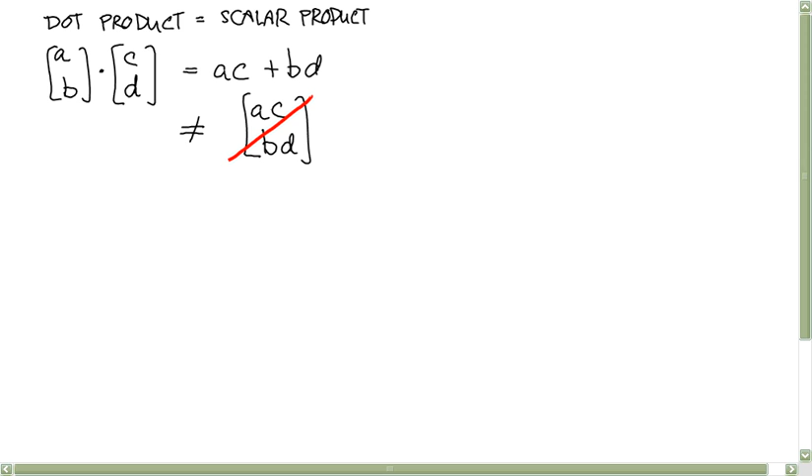And then the second thing was vector notation. Say something like this - that overarrow means... I don't know if I'd call this a definition of what a vector is, but I think this is a good way to think of it: anything that has this overarrow over it means you can break it up into components.

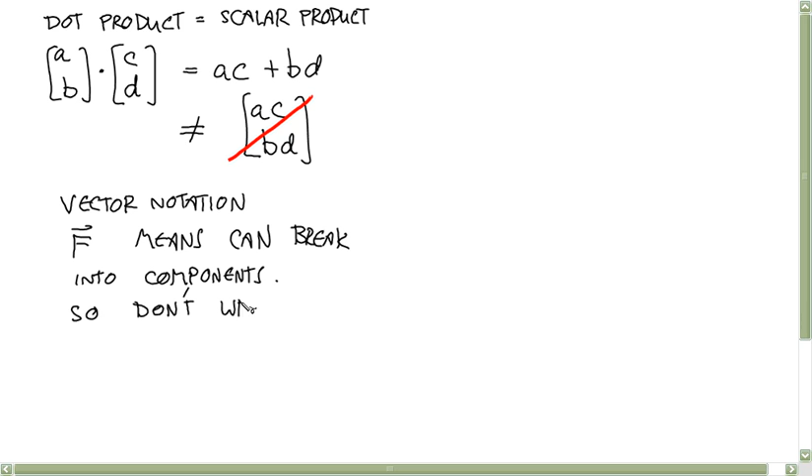Don't write this vector f as equal to fx, fy with the components having vector notation, right? Because we're all the way at the lowest level at this point. There's no components inside these components.

When you're talking about vector components, you should write those without arrows, which indicates that those components are scalar variables. And that's what they should be - you have a vector whose components are scalars, and this is how you indicate that. So when you use these components in equations, they shouldn't have arrows over them.

This is useful in making it clear to yourself what you're writing about. And it's also useful in the dirty little secret of engineering, math and physics - if you write stuff down the right way, people think you're smarter. So this is an easy way to look smarter, and some of you really, really need that.

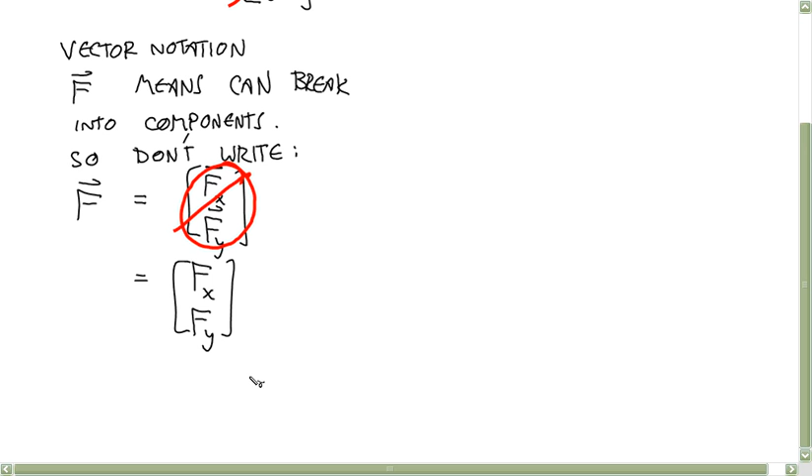All right, enough of that.

So today I'm going to finish talking about structures, and the way I'm going to finish is by - you might ask, hey Mr. Lakin, how come the way we did structures for 2 weeks in this class is not the least bit like what they do in the book? Doesn't that seem a little weird? So that's what I'm going to talk about - why the book approaches structures in a totally different way. I'm going to do one example problem, tell you the benefits of how they do it, and tell you why we did it a different way.

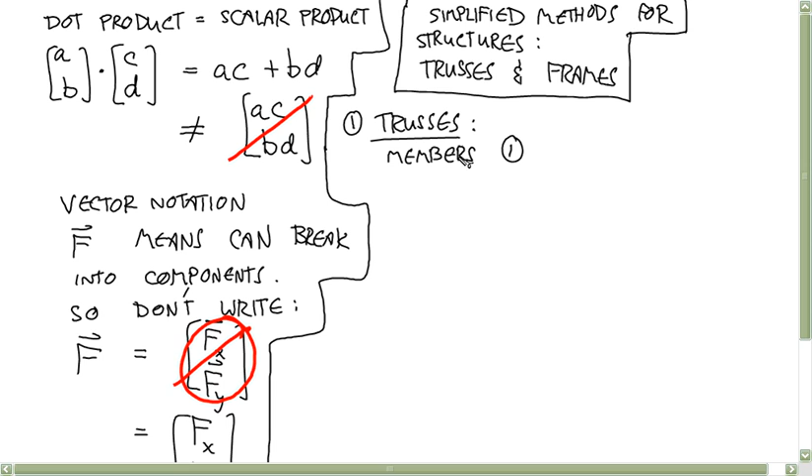So first, trusses. Here's what a truss is: it's a set of members connected by pins. I'm going to number the things required to fit into this category of trusses so you can use the method in the book. These members are connected by pins, the weights of the members are neglected, and all loads on the structure are applied at the pins.

And if any of these conditions aren't met, you can't use the method in the book. That's a pretty strong set of requirements. This whole method that half of chapter 6 is spent on - just decide you want to take the members' weights into account and you can't use it, or decide you want to apply a load at the midpoint of a member, and you can't use it.

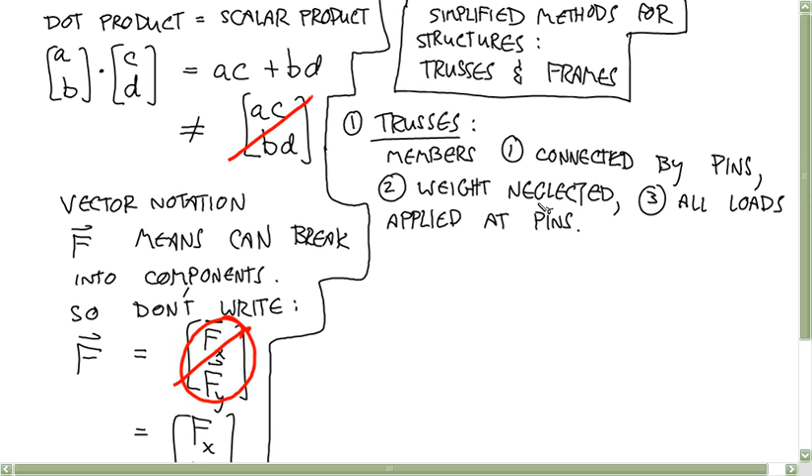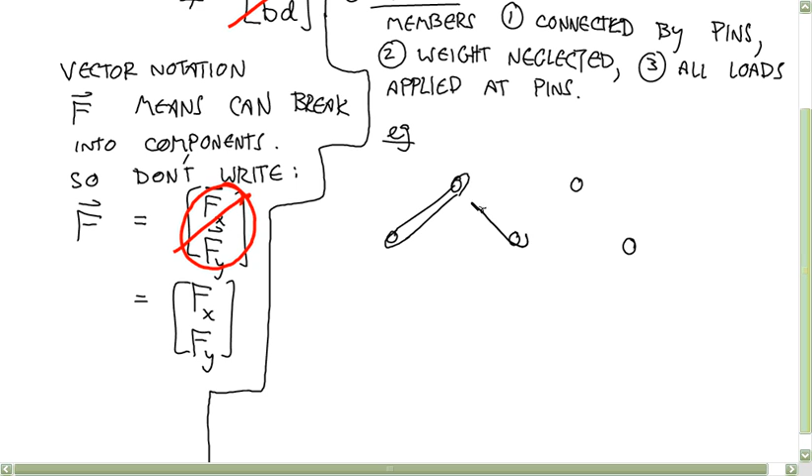So here's an example of a truss, and I think this is the example I'm going to solve. That's a pair of rollers there on that side. Okay, assuming these conditions are met for this truss, what are the loads in each of those members? Who can do that in their head? Weights neglected - yes, thank you - zero loads. So we got to apply something, because with zero weight, nothing's applying forces to anything. So I'm just trying to see who's awake - one person, that's better than average. Okay, so we'll apply a load at that pin.

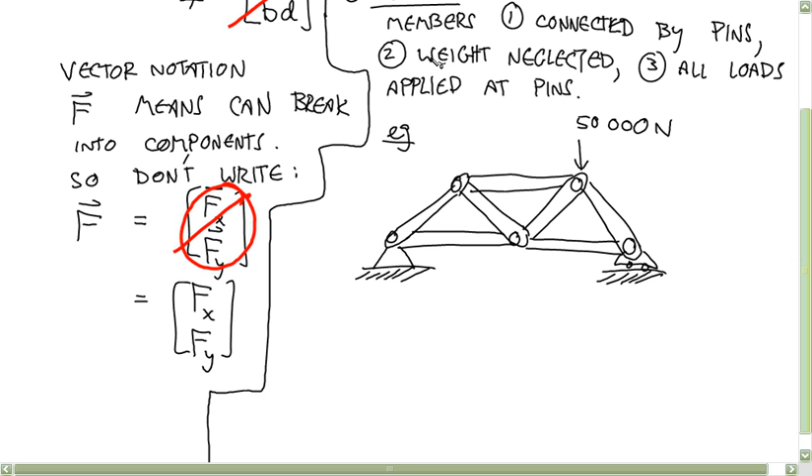And the simplification that we make, if all these conditions are met - like what can we do to make this problem simpler, to reduce the number of equations? Because that's what I mean by simplified - we're just going to have fewer variables and fewer equations needed to solve it. So if those conditions are met, the simplification comes from the fact that every member is just a two-force body.

And that means the forces along each of those members have to be along the line between the pins, right? That's a requirement, or a fact about two-force bodies. So the forces on each member are along a line between the pins. If you lose any one of these 3 conditions, then you don't have two-force bodies, and that's why this doesn't translate to any other types of problems.

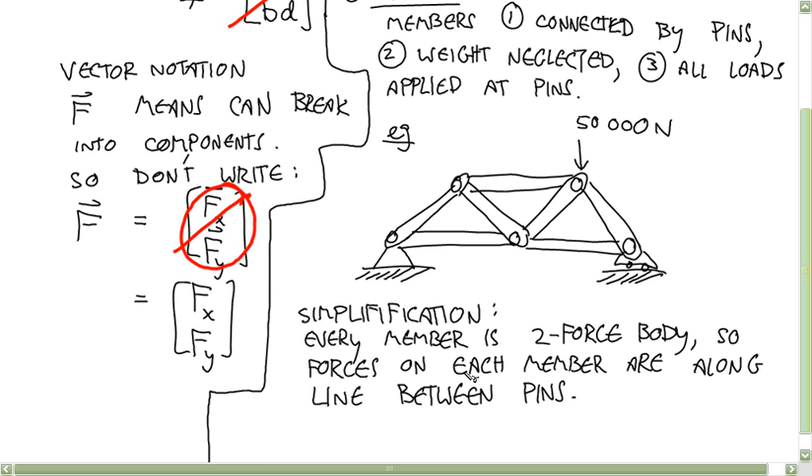Okay, so this was trusses. The second type of structure dealt with in chapter 6 is frames. And the requirements for frames - there are also 3 conditions that have to be met for this to meet the book's definition of a frame. The members first have to be connected by pin joints.

Second, only 2 members can connect at any given joint. And third, the loads have to be applied to the members themselves and not to the pins.

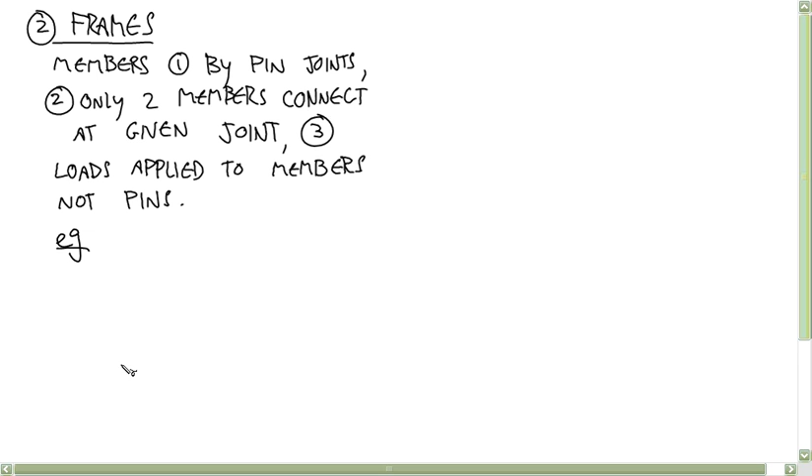And third, on these frames, the loads have to be applied to the members themselves, not at the pin joints - like this is applied to the pin. An example of a frame would be something like this. So these are all pin joints. This doesn't have to be a pin joint, by the way - that's a fixed joint in my example. But notice at any one of these joints, unlike the truss I drew, at any joint there's only 2 members connected.

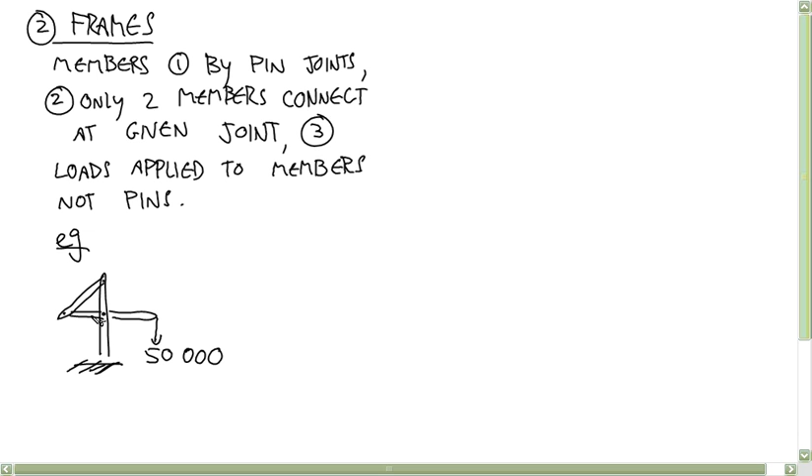The simplification comes from the fact that there are only 2 members connected at each joint.

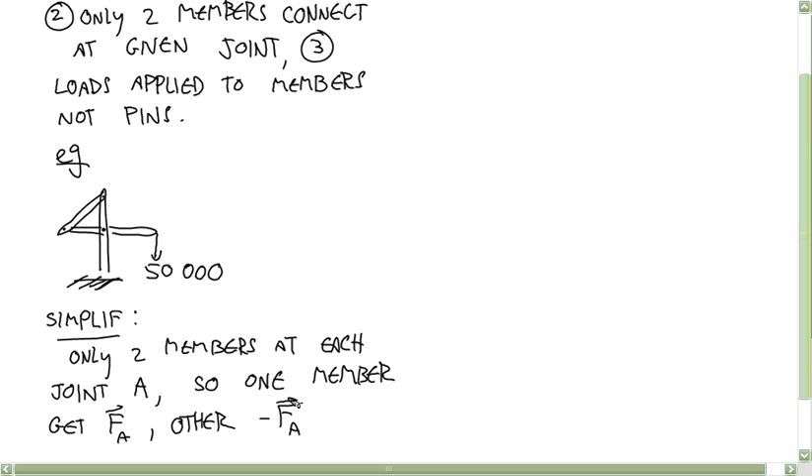And I'll say at each joint A, one member has a force applied on it that we can call FA, and the other one has a force applied to it, negative FA. Because of this set of conditions, we can talk about joint forces, the joint force FA. And actually, this method makes bookkeeping a little simpler than the way we talked about it before. But for the most part, this is fundamentally the method that I gave you for general conditions.

There are some things that make this method in the book a little easier, but I'm not going to go into that because it's similar enough to our method that I don't think there's much point. But I do want to do one example of a truss problem, so you can see how much this method reduces the number of variables, reduces the number of equations, and you can see how it all works. Actually, the simplification you use in a truss is something you can apply whenever you can apply it to any individual member of a structure that is a 2-force body.

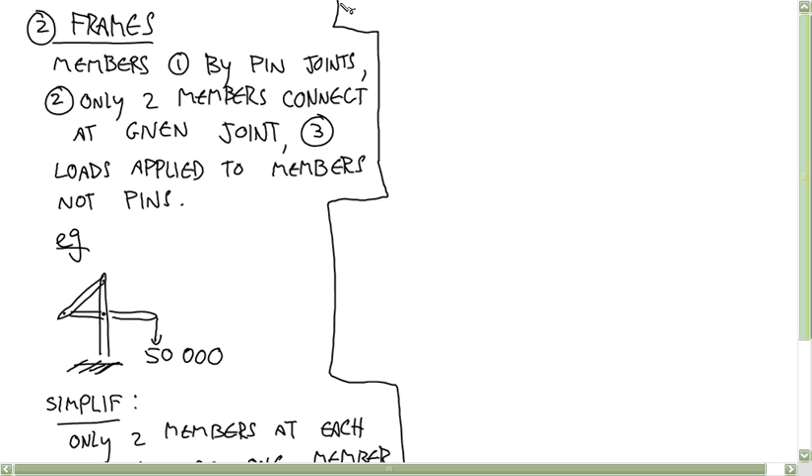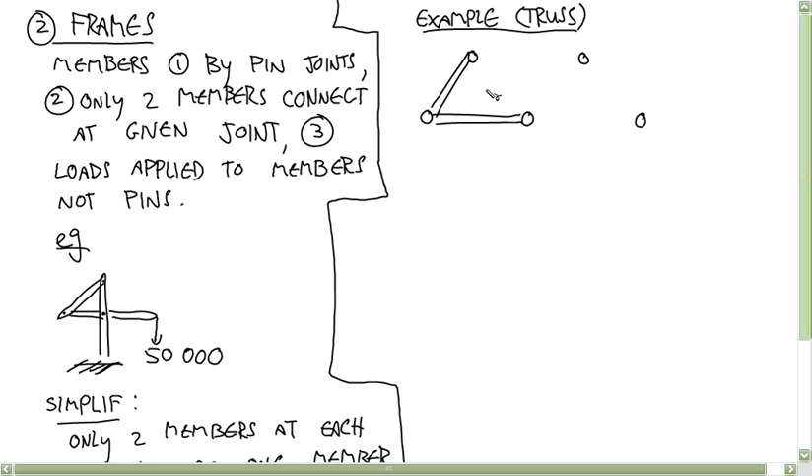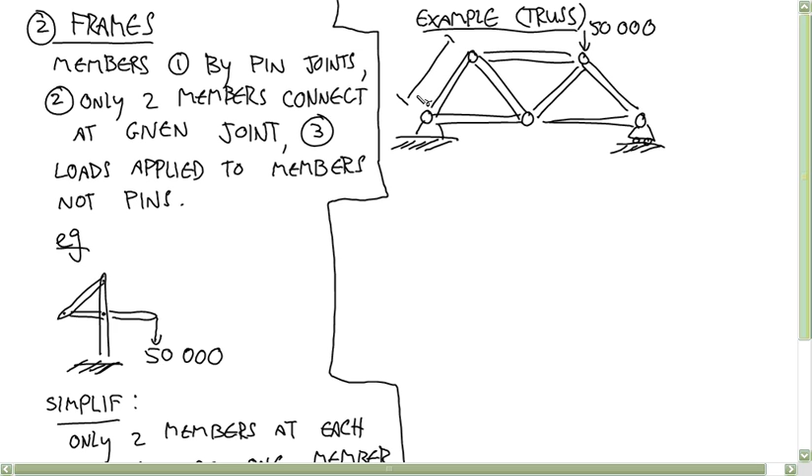So let's do this example, the one I drew here. I'll say that these are all equilateral triangles and all the lengths are 1 meter. Makes the math pretty easy. So 1 meter, and then all these angles are the same.

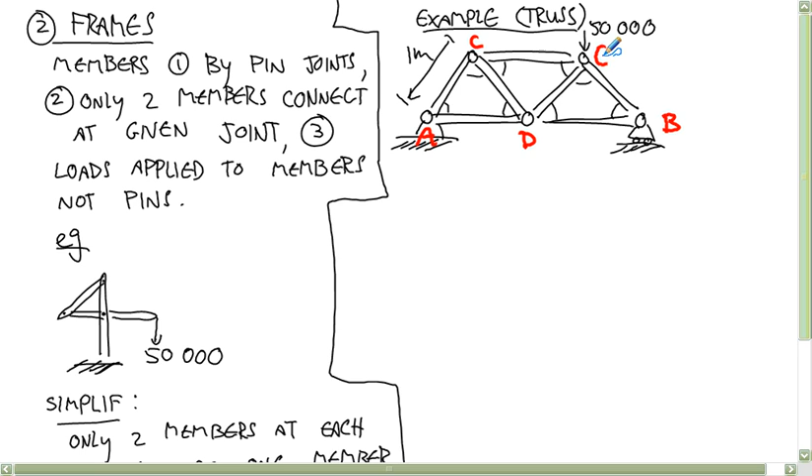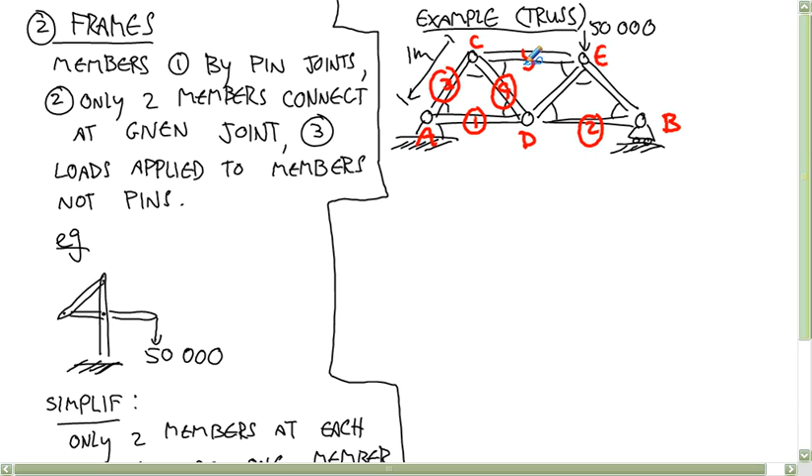So the first thing we're going to have to do to solve this truss is label all the joints and label all the members. So I'll say A, B, why is B over there? Who knows? C, D, E. This is literally the craziest lettering system I ever put together in my life. And then number the members: 1, 2, 3, 4, 5, 6, 7.

So the first step is the same first step that we do with our general method. We're going to isolate the whole structure, the whole truss, and see what we can figure out about the reaction loads. So the free body diagram looks something like this. There's the 50,000 Newton force.

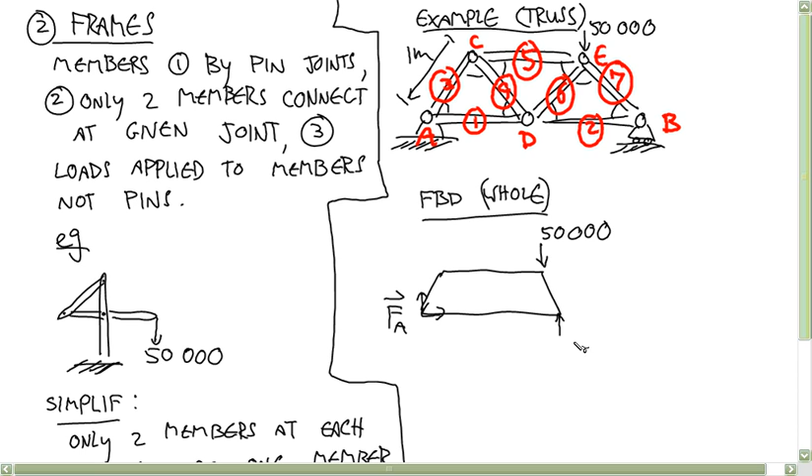And what kind of forces are acting on the whole truss at A? A force vector, yep, right. So I'll call that the force FA. And what's acting at B? Yep, so that's just a force perpendicular to the surface of contact. I'll call that force FB, and that's just a scalar.

And since these are all, we're going to see that everything's vertical. If this doesn't occur to you as something you can simplify immediately, that doesn't matter. Just write out the whole table. But I'm just going to go straight to Newton's second law and the rotational equation. So we have FAX, FAY, plus 0, FB, that's this force, plus 0, negative 50,000, is equal to 0, 0.

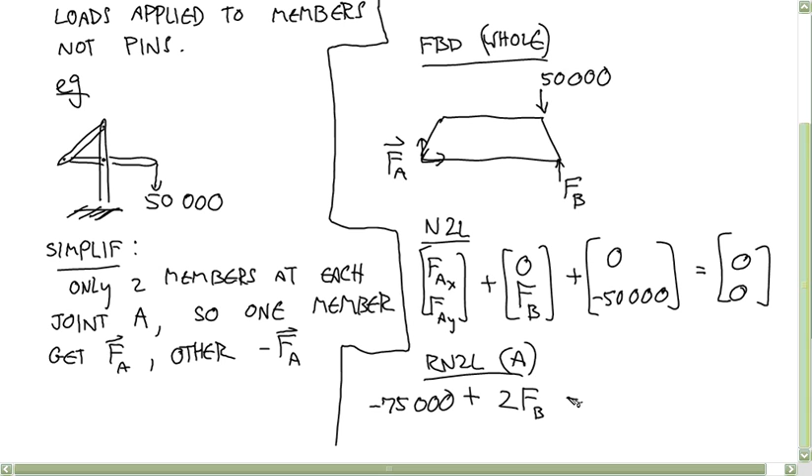And then the rotational equation, I'll calculate it about A. So there's no moment due to this. The moment arm for that 50,000 Newton force is 1.5, and that's going to produce a clockwise rotation, so that's a negative moment of 75,000. And then the moment arm for this force FB is 2, so 2 FB equals 0. You can solve this for those three variables. You get FB is equal to 37,500, and the vector FA is equal to 0, 12,500.

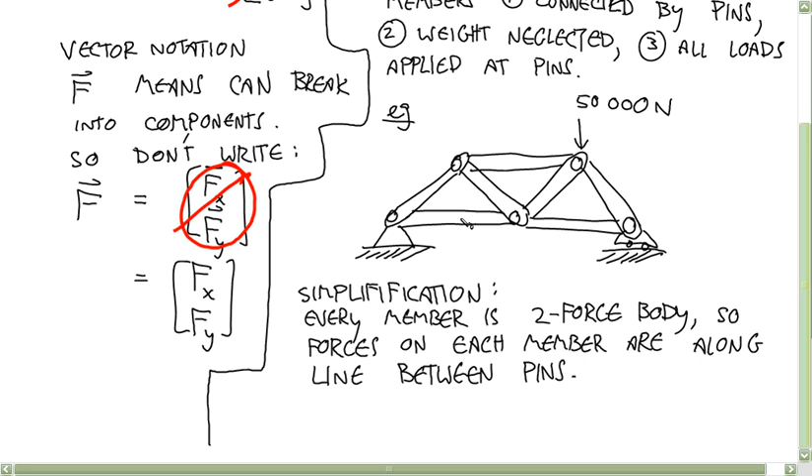So far we haven't done anything different than we do using our method. Now the big simplification comes. If you're looking for practice to clarify some of these ideas, here's something interesting that clears things up: try setting this problem up as a system of equations using the general method and see how many equations you get. It's a huge number, right? A truss like this big would be a very big system of equations you have to solve. That doesn't make it hard, but it makes it tedious, and especially back when people had to do a lot of these calculations by hand, it makes it something you want to avoid.

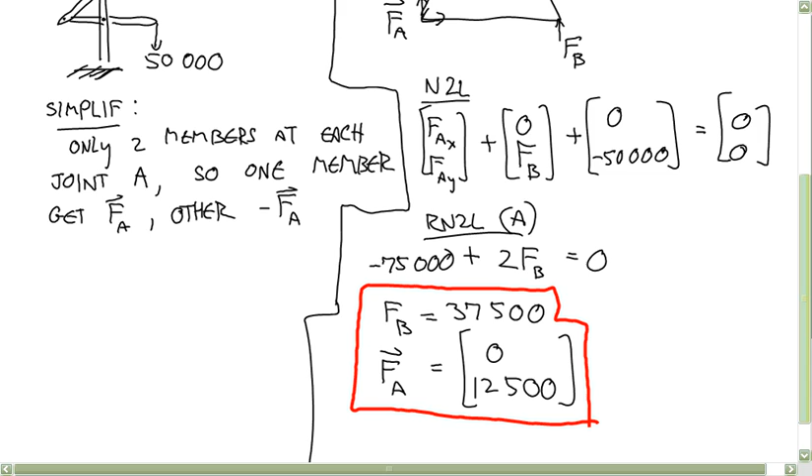With this specific truss method, we're going to get a real limited number of variables and equations. Okay, so now what we're going to do is go joint by joint. And since we know these are two force members, we know that those members have forces applied along the line between the joints. By Newton's third law, that means we can assume that the joints have forces acting in the directions along the members. So we're just going to go joint by joint, and since each pin joint can be thought of as a particle, we're only going to use Newton's second law. We're not going to use the rotational equation at those pin joints. So for every pin joint, we can get two equations, and the only variables we have are the force in a member represented as a single scalar. We know the direction—it has to act along the line of the member.

So let's go to a free body diagram of A. What forces are acting on that joint A? Well, we have this force FA coming from the pin, or from the ground, however you want to think about it. And we already know the magnitude of that, 12,500.

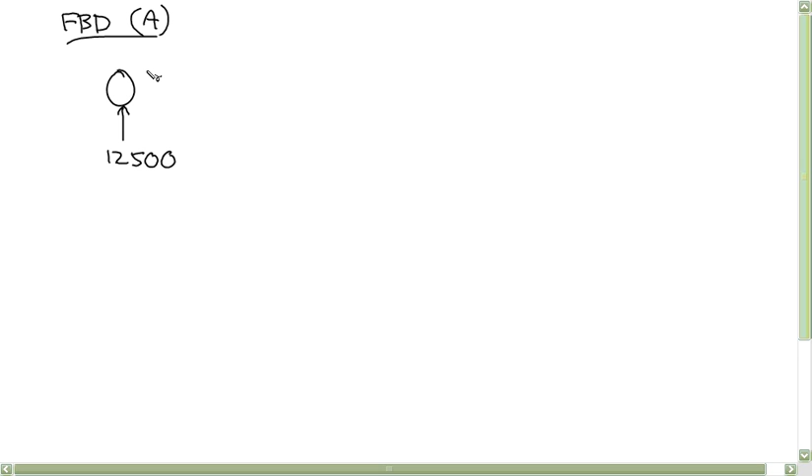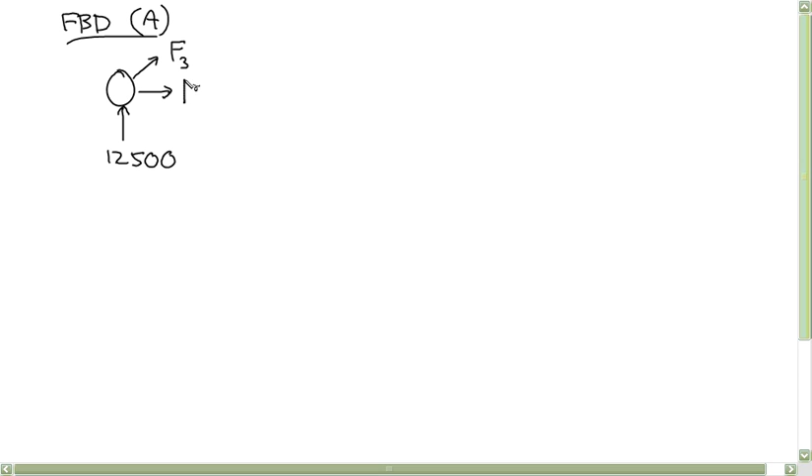So if the members are in tension, say that this member 3 is in tension, which direction is it going to pull on that pin A? Right, exactly. So we'll have a force that I'll call F3, because that's the force applied by member 3. And what direction is this member 1 going to apply at that pin? The right, yep. And those are the only loads acting on that pin.

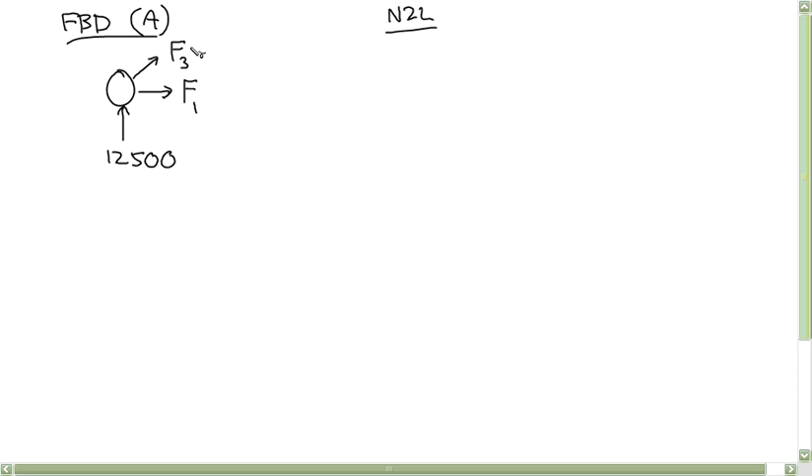So Newton's second law says, and you have to do some stuff with unit vectors, but we have 0.5 F3, 0.866 F3. I say unit vectors, but in this case you're just using sine and cosine to calculate what those are. But remember, that's what you're doing, calculating unit vectors. Plus F1, 0, plus 0, 12,500 is equal to 0, 0.

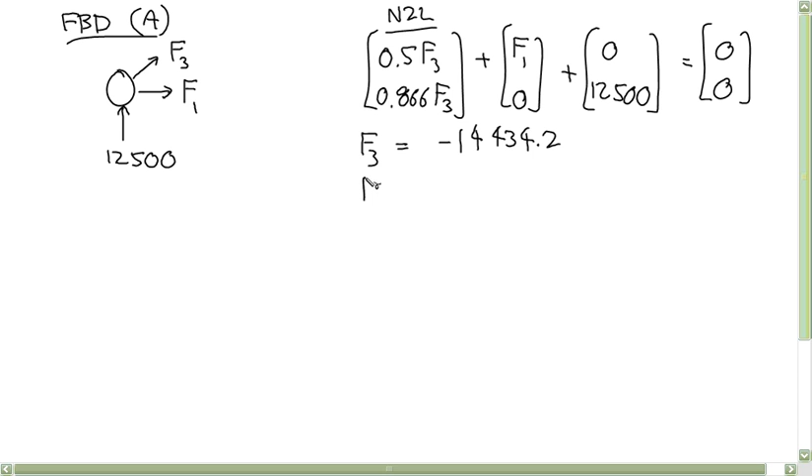And here again, we can solve for these variables as we go. You can't always do that, but sometimes you can. F3 is equal to negative 14,434.2. F1 is equal to 7217.09. Since F3 we got a negative answer, that means this is in compression. F1, since we got a positive value, that means it's in tension.

And now we'll go on to free body diagram of B. At B, we have a 37,500 Newton force acting up. Then we have the force due to member 7 that's acting. We're assuming, again, it's in tension, so this time it's going to be acting up and to the left. So we have F7. And then we have F2 acting to the left.

So we have, for Newton's second law, negative 0.5, 0.866, F7, plus negative F2, 0, plus 0, 37,500 is equal to 0, 0.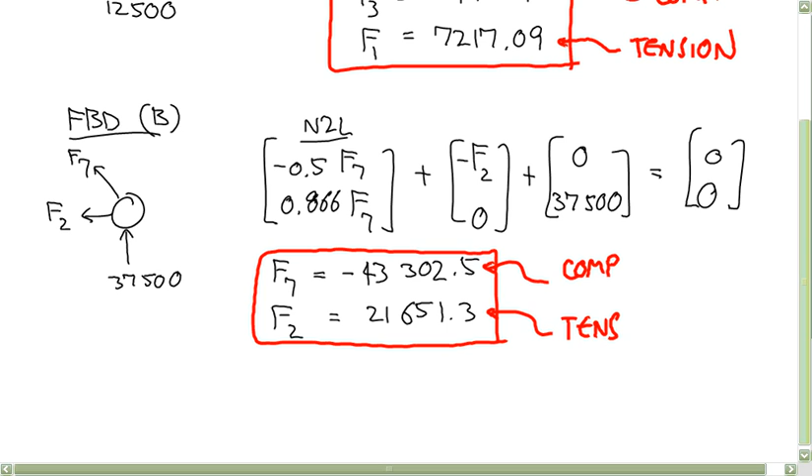And what loads are acting at D? We have a force F1. So remember, F1 at A, we're assuming it's in tension, so F1 at A was pulling to the right. Now, again, we're assuming it's in tension, but this time that same member is pulling this joint to the left. If it's in tension, it's trying to pull those two joints together.

So we have this force due to F1, and our force F1 was 7217.09. F1 is the one that's going the other way, so yeah, it would be negative, but I put the arrow going that way.

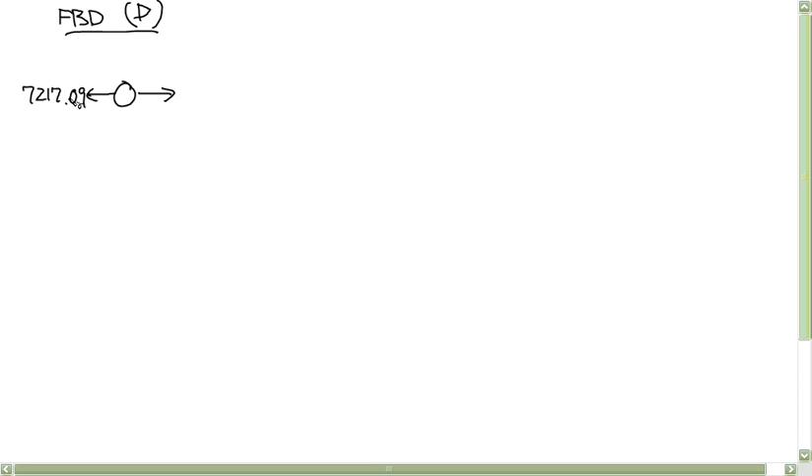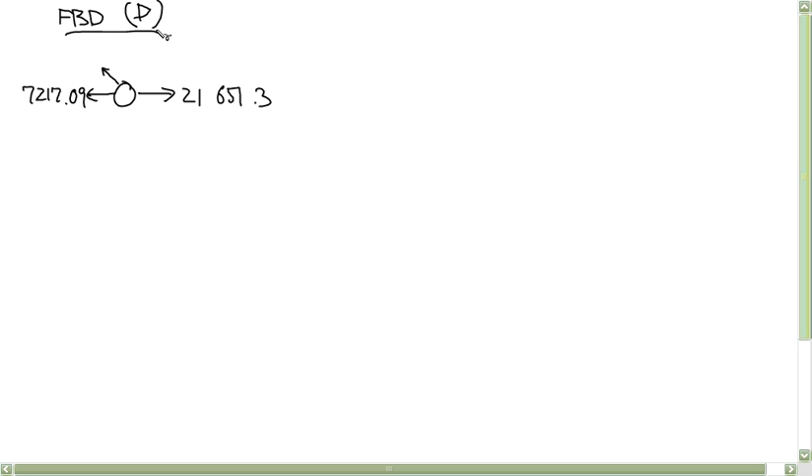And then going this way, we have the force F2, that's 21,651.3. And then we have a force F4 pulling that way, and a force F6 pulling this way.

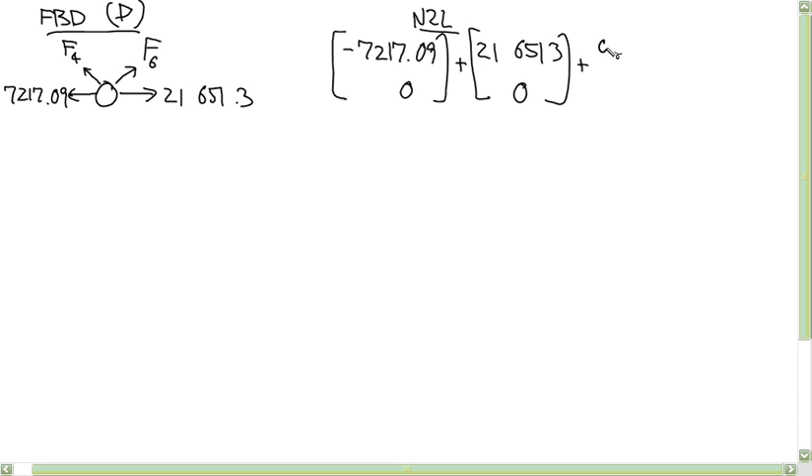So Newton's second law says negative 7217.09 plus 21,651.30 plus 0.5 F6, 0.866 F6, plus negative 0.5 F4, 0.866 F4 is equal to 0, 0.

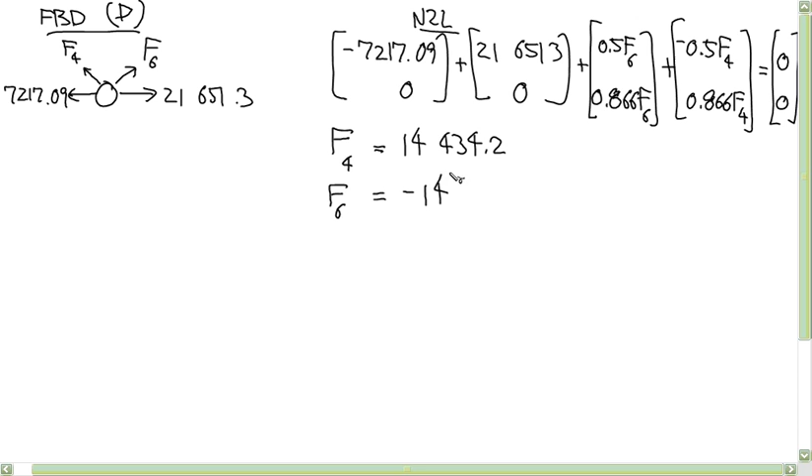And again, two equations, two unknowns, so we can keep just solving these as we go. No, we can't, can we? We should be able to. Yeah. So we get F6. This time, I guess you can't solve one equation for one variable directly, you have to solve it as a system. But you get that F4 is equal to 14,434.2, and F6 is equal to negative 14,434.2.

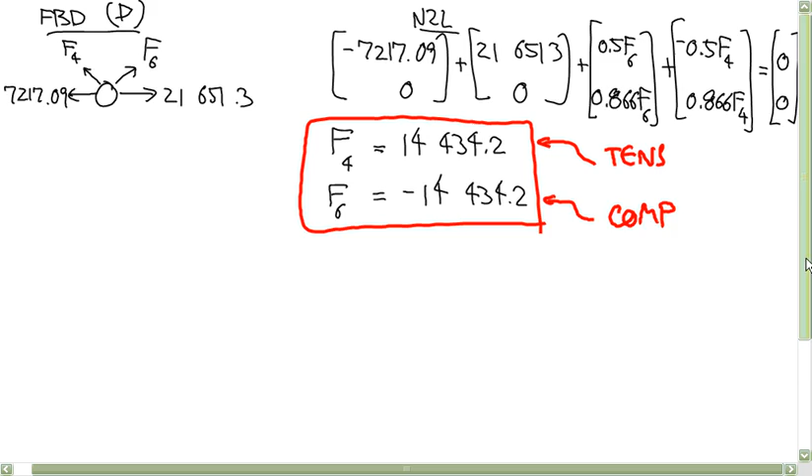So member 4 is in tension, member 6 is in compression. And now there's only one variable we still don't know, we don't know the force in 5. So we need to pick one of these joints that 5 is connected to. Okay, I'll pick C. So Newton's second law for C.

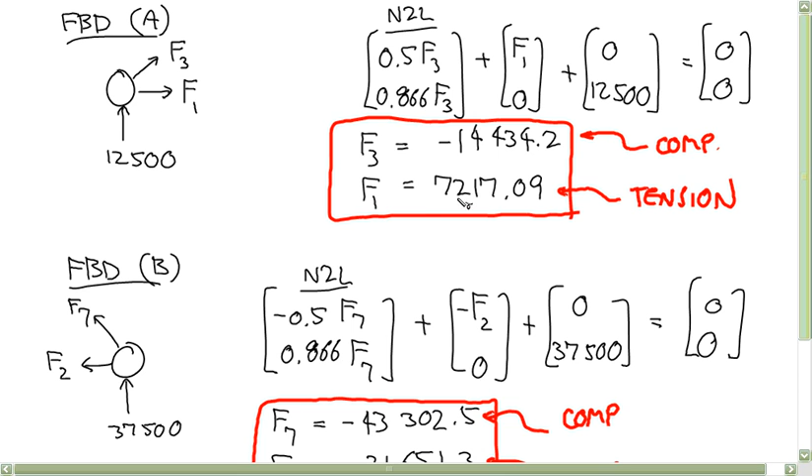What's happening at member one? There's this relatively, compared to the other forces, small tension force. We're not too worried about it. Members 3 and 4 and 5 and 6, some are in compression, some are in tension, but those forces are like twice as big as member 1, but there are still bigger ones, so those aren't our main concern.

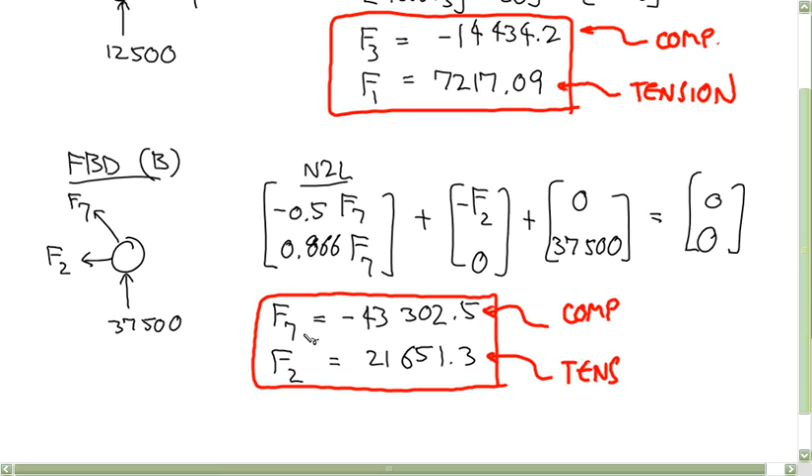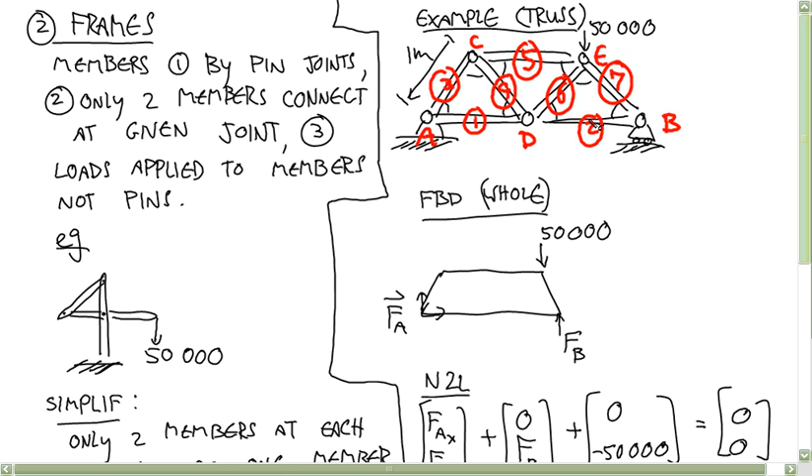But then you see that members 2 and especially member 7 have these big loads. So you'd look at this design and say, member 7, right here, I'm concerned that that's going to fail in compression—that's going to collapse. And member 2, I'm concerned that that's going to fail in tension, it's going to stretch, elongate. And that's how you'd use this information. But of course, you can get that same information from the general method; it just isn't quite as concise or easy, quick to solve.

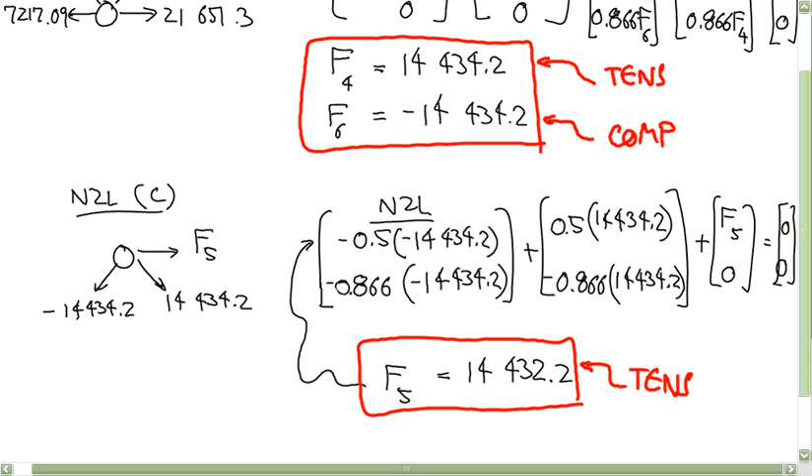Now, is it again for the truss method, you have to assume that the force is being applied at a pin? Yep. Right, so like if you were gonna say how much weight can the bridge hold, you can only do that if you're applying forces, like say at the pins. That's along the truss. That is true. Does that affect at all the calculation? Like say if instead you're worried about, well, what if the bridge fails in the middle of the member, does that change the analysis at all, or will it ultimately result?

Usually, in a truss, you wouldn't be worried about that, because the next thing we're going to talk about is internal loads, and we'll see that if you have a two-force member, the internal loads are the same everywhere. So just knowing what those tension or compression values are already tells you everything about those internal loads—they're the same everywhere. So you wouldn't worry about that specifically.

But I suppose you might worry, like, how is the bridge loaded? I guess you would build the truss, you'd lay something on top of it that would be loading a bunch of those pins at once, you know what I mean? And so you do this analysis of the truss, you'd combine that with an analysis of the beam laid over the top, which is actually a plate, but if you're doing it in 2 dimensions like that. So yeah, I think it works pretty well. And I don't know much about the civil engineering they do to design a bridge, but I wouldn't be surprised if just that simple truss analysis is still used for some areas of looking at bridge design.

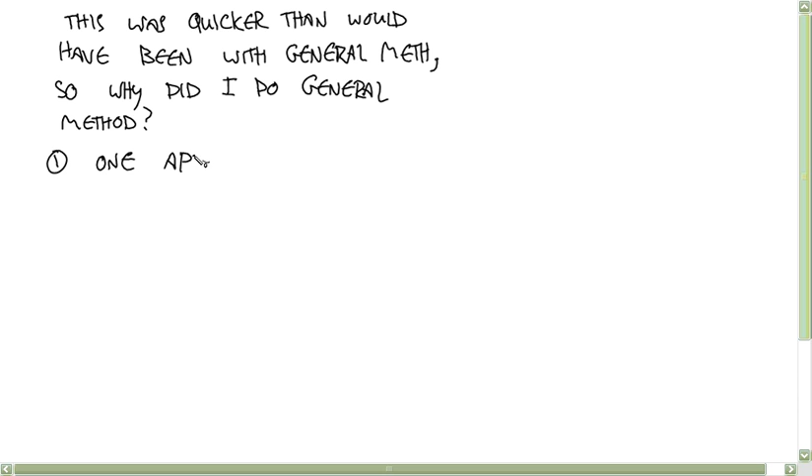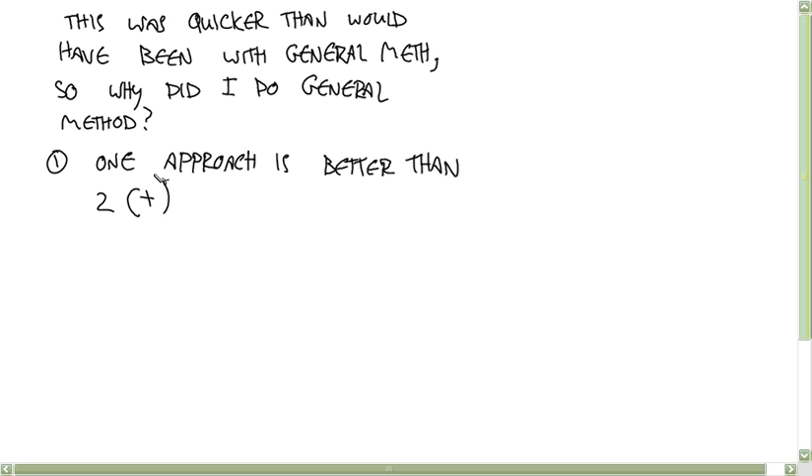So first, one approach is better than two - and I'll say two plus, because those two methods that they teach in the book still don't give us all the power of the one general method. Two, in practice, you wouldn't solve this by hand.

So the benefits of that truss method - what do I mean by in practice? If you're in a position where you have to get a right answer, you wouldn't solve it by hand because you just make too many mistakes. I suppose you could do it by hand four different times, and if you get the same answer all four times you could be pretty confident. But for the most part, especially with even a moderately complicated problem, you're going to write a computer program because you just don't trust your own calculations.

And like I said, that was a really important question - well, someone still has to write the computer program, so it's simpler for the person writing it. But that's not exactly true. Programming the general method isn't any more tedious than programming the truss method.

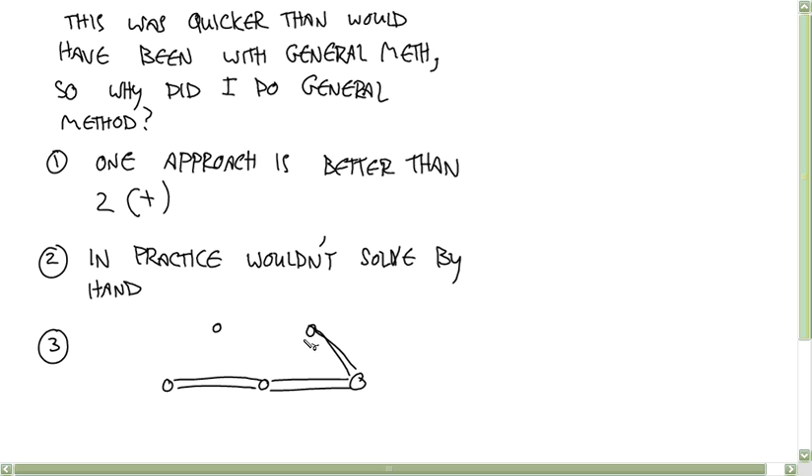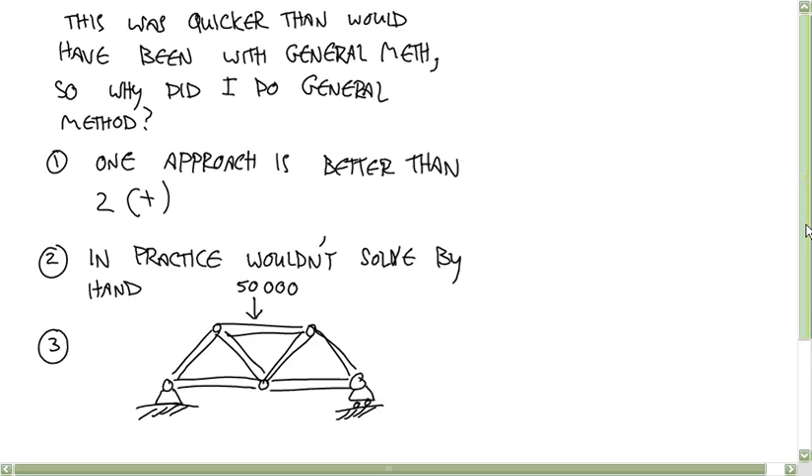And the third thing is, of course, what about this problem, or a million other ones you could come up with easily? If we just change one tiny detail, now we can't solve it, or we have to come up with a whole new approach. So with the method we did, you can solve any collection of bodies you can put together with joints, and that's worth a lot of extra calculating.

Okay, anyone have any questions? Yep - on that one, could you use the general method just to solve like that middle triangle, find the reactions along those joints, and then use the truss method? Yeah, how would you do it? You're definitely onto something - that might not be exactly the way you do it, I'd have to think about that.

But what you could do is, for all of these two-force members, when you isolate this member, just treat it like you have forces F1 acting in known directions. That's how you use the spirit of the truss method to simplify the general method. So now instead of what would have been 4 unknowns, we have 1 unknown, and that cuts down the number of equations you need a lot. If any of you are working on problems and see a two-force member and can't figure out how to use that, come by my office or talk to me after class.